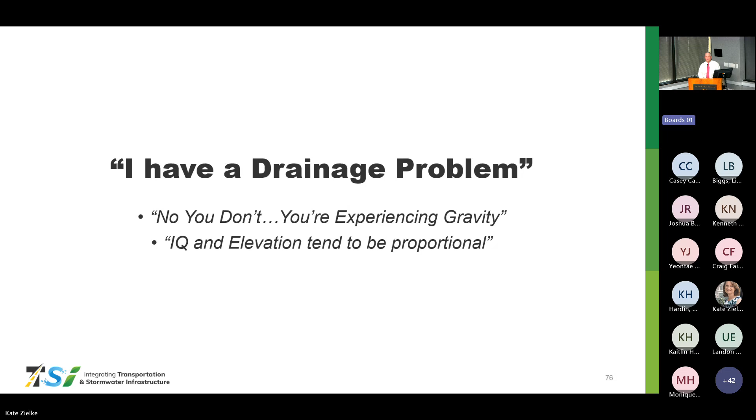Whenever we're encouraging low impact development techniques and other green infrastructure design considerations, I ran into an issue. We kept having problems in our developments, and I got to looking.

Whenever I was doing bridge designs and culvert designs earlier on in my career in Wise County, I was using somewhere around 10 inches per hour for rainfall intensity. I got to looking at some of the developments that were getting turned in, and they were using 6 to 7 inches per hour. If you look at that calculation real close, that's a 53% increase in runoff that we were not accounting for. I'm still having issues with that. Some of the developers' engineers are sending those to me, and I'm having to correct them and say, quit looking at a graph or a bar chart to find your runoff and start doing the calculation so that you're actually accommodating the actual runoff we're experiencing.

I've heard the phrase go green several times today. I would encourage you to go native instead. We're having problems with developers when we're doing our thoroughfare plan. They say we need water, whether it's surface water or groundwater.

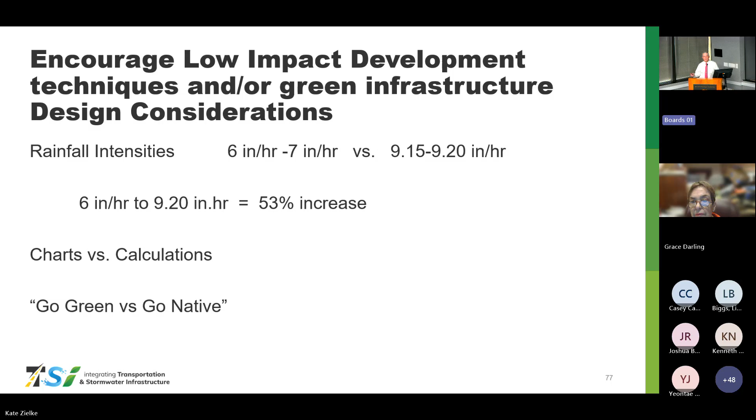Everywhere I go, people are running water out on the ground so their grass will look green. The reason I say that is because where I'm from, you get 26 to 29 inches of rain per year on average, and people are bringing in St. Augustine grass from Houston. You can't sustain it in that environment without running water out on the ground. So I would encourage you to start looking at going native instead of going green.

Protecting against erosive velocities, we put it in our development rules and regulations, and I'd encourage you to also start having pre-development meetings with your engineers and developers, and pre-construction conferences. I've had pre-development conferences where one guy came in who had already bought the property. I said, you don't have access onto a TxDOT road, you're in a floodplain, you're in a breach inundation area, and you're not building roads that'll meet Wise County specs. By strike 5, I thought he was going to need professional counseling.

But if you can speak to these people before they get into it and buy that property, then you can at least let them know what they're getting into and what they're going to have to do to meet your standards, to meet your criteria.

On ours, we've got a maximum of 6 feet per second. I've got a lot of sandy country on the west side of Wise County, and we're also saying no more than a 5% increase in velocity. As for rock filter dams, I don't know how many sets of plans I've had where somebody puts them in our ditch, and then it's something we've got to maintain. They don't automatically fix the velocity problem.

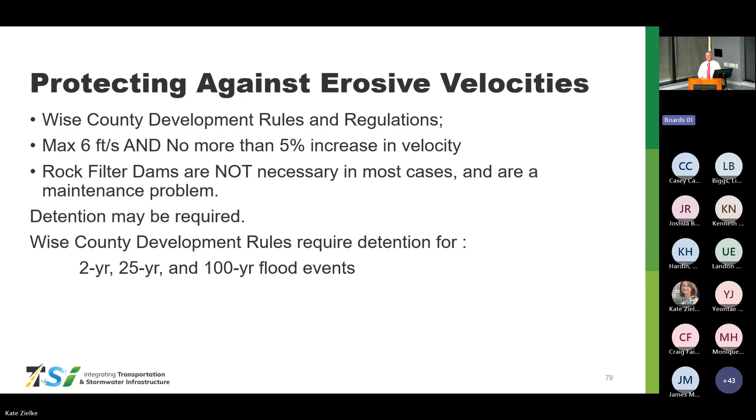We've already touched on this a little bit, but this is where we get into the 'I hate change' part. Remember this phrase - I've tried to tell this to a lot of young engineers and older engineers that should have known better: the Almighty had a good plan, try to stick to it.

Whenever you think about that, in our development rules, we've made it where there is zero change at the boundary of the development. And we've had to defend this with FEMA also. We had a 4,400 acre development. We reviewed it, zero impact at the boundaries.

They came back and an EIT sent me an email saying you're in violation of your own ordinance. I said, no we're not. We had a meeting with the developer, his engineer, myself, FEMA, the contractor - there was a dozen people in that room. I told the people from FEMA on the screen, we reviewed this and said there's a zero change at the boundary. There's no impact to any of the structures, and there wasn't but about 5 structures on the whole property. And they said, well, this will be the easiest one we've ever reviewed.

Notify the impacted properties around you, proceed. That was it. So I would encourage you to do a zero change.

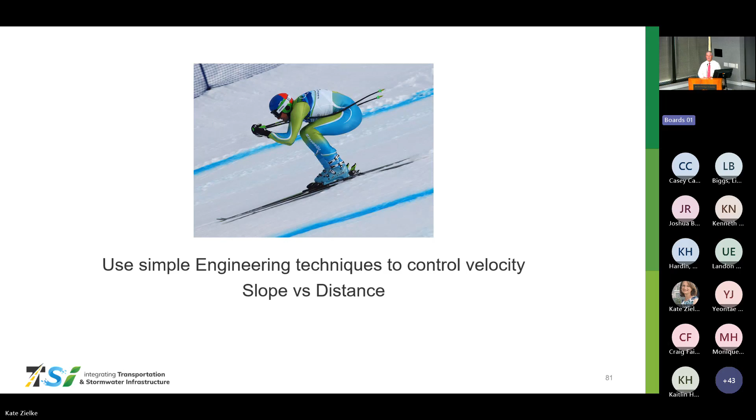I'm not going to get into Jelane's topics too much, but I will encourage you to look at flood control dams. In 2015, the flood that was mentioned, we had two roads in the county that got washed out. They were both downstream from where we did not have a flood control dam. Everywhere that we did, we might have had damage, but we didn't have this.

This one was one of the places. That hole is about 9.5 foot deep and 45 foot wide. That used to be a road. It washed out a 48-inch pipe, and we never found the pipe. It is downstream somewhere on somebody's property. So I would really encourage you to look at your flood control dams.

Also along those lines, one of our Wise County title companies went back and refreshed all of their easements, because whenever you have a flood control dam, there's usually an easement, and it may be a blanket easement for that whole property. If you have an easement, you've got some leverage. That title company did that because most of those lakes were built in the 50s, 60s, and early 70s. If you go back 50 years, you quit seeing that come up on the title search.

By that title company going back and refreshing those, now the first thing they pull up on that property is that easement, and it tells that developer, and you, don't build here. But you would be amazed how many people think we can build there and we'll have lakefront property.

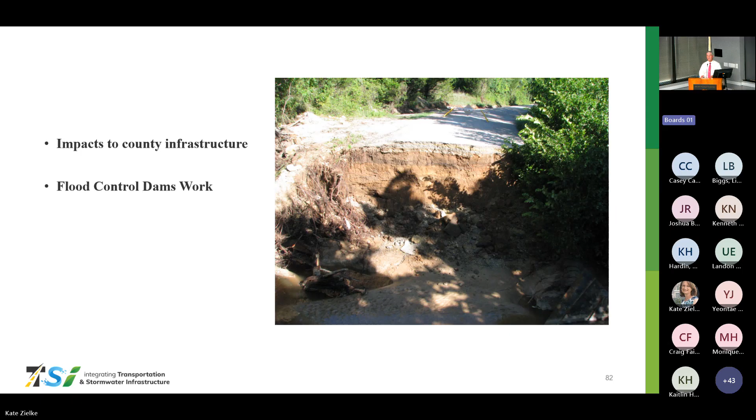A lot of the things you're going to have to deal with, and this is in a floodplain. I was threatened to be sued by two different lawyers over this property this year. They called me and said, well, you can't say no on that floodplain permit. Neither one of them has got it to court yet. The word no does work.

You have very little leverage in the counties. You have no zoning authority. Counties in Texas do not have zoning authority. I can't go in there and say you can't build here because of this reason. The only thing I can do is say you can't get a floodplain permit, and that is to get permission.

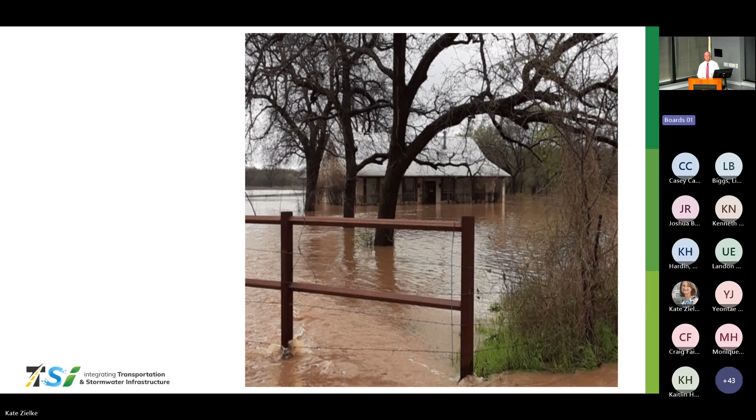This is the same house. It looked great a minute ago whenever it looked like you could do some yard work in it. That house stayed four foot deep in water for six weeks during 2015. But right now, I've got people wanting to build in it. That's the barn right beside it. There are huge impacts to private and public property, and I'm taking this picture from the public road.

Put this in your development rules and regulations and in your flood ordinance. I would encourage you to look at that zero point zero change, because the people who have to go back in here and get a floodplain permit are going to have to get one for the existing conditions. Then they're going to have to come back and say, all right, here's one for the proposed conditions. To do that with zero impact, most of them get ready to sell after they find that out.

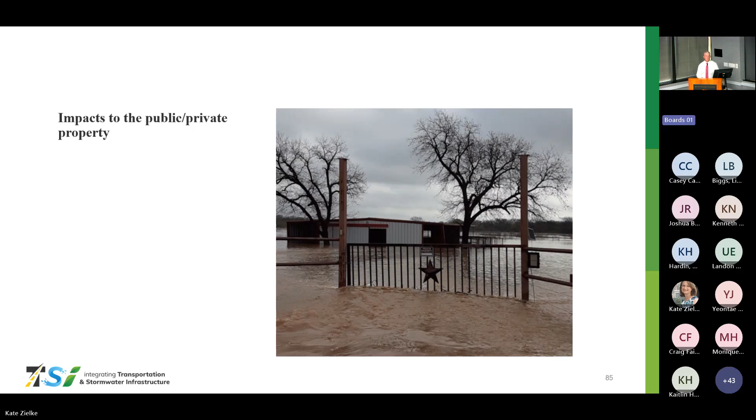The person who owns it now bought it sight unseen. They'd never even seen it there. There's a flood gauge 200 yards up the road from this place. They said, we've never seen that. So they didn't even know.

When you're talking about the size and conveyance of streets and storm systems, adequately and safely conveying traffic - the guy who took this picture lived on the side that's shut off. He had no other access out of there. This is in a platted subdivision, not in the Zone A floodplain. This one is not, but it's also upstream from one of those flood control dams. This road should never have been allowed to be built.

We've also made it where you have to have at least two points of access on developments of 25 lots or more. Summer before last, I stood at a gate at the Wagner Ranch and reported a fire. It took them 20 minutes to get there with either a set of bolt cutters or a set of keys to get in. I watched 100 acres burn in that 20 minutes.

The guy who was on the committee with me for the development rules and regulations said all five of us on that committee were also first responders. He said, Chad, you know we can get in there. I said, yeah, we can get in, but can those people get out? They might not have bolt cutters or a key to that gate. So we've made it where they've got to have at least two points of access for any lot, anything over 25 lots.

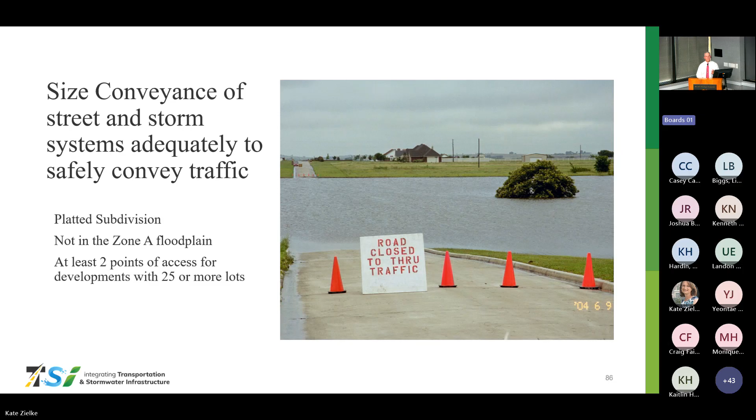Breach zones, breach inundation zones. I'm not going to get into the lanes too much, but you need to have this in your development rules and regulations. This property right here, it's hard to see, but you can see the house built on the right, and the lake a little over to the left.

They are not allowing us access to where we can maintain that dam. I also had, on June 23rd, a legal hearing over a lawsuit about breach inundation zones. He said, you can't do that to me, that's a takings. As an engineer, I'm required as the first canon in the code of ethics to protect the public safety, health, and welfare.

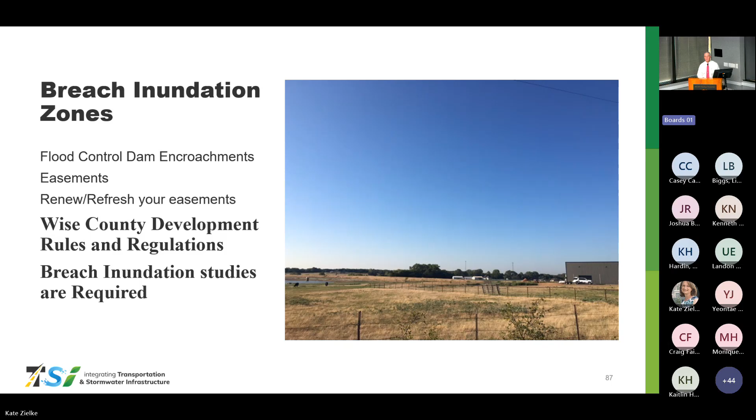Unfortunately, you've got some legislators who would like to strike that out of Chapter 232 of the local government code. I'd encourage you to speak to them, say leave that alone. We need the ability to protect the public safety, health, and welfare.

Jelaine probably knows where this one is. Can you see the dam to the left? Can you see the houses immediately downstream to the right? I actually had a pre-development meeting with somebody who lived in one of those houses. It was all I could do to keep from telling him, you're an idiot.

Why would you build immediately downstream from a place that could breach and take you off the map? That sounds funny now, but think about down there in the hill country. How many people would build back where it just got flooded and washed out? People's memory is short. They had a flood down there in '87, and another one in 1932. People still want to go back, and developers still want to go back and put houses and people there so they can make a profit.

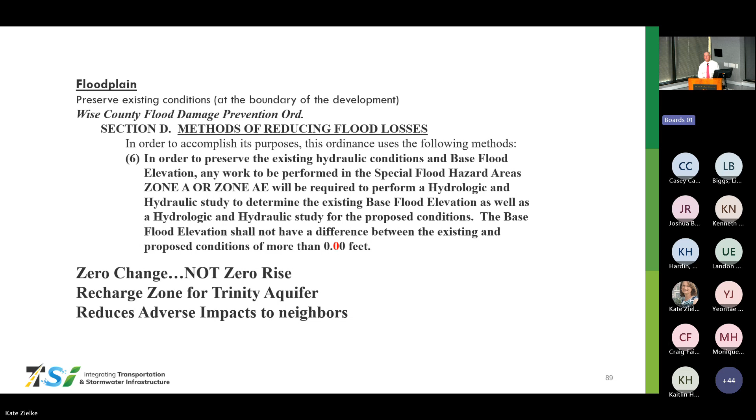Remember this one: zero change, not zero rise. It puts a bigger burden on the developer and his engineer to keep people out of the floodplain.

Breach inundation, that's in our development rules also. We've got it where they've at least got to do a study to see where that breach inundation zone is, so that we can keep people out of an unsafe situation.

Detention rates, I've mentioned those for 2-year, 25, and 100-year storms. So far I've only had one of those since we put that in. It's not that hard to design, but you'd be amazed how many said, well, we've never done that. My response to them is, you're an engineer, your job is to find solutions, figure it out.

How many of y'all remember this from earlier this spring? It's important to keep people out of those areas. That dam washed out, and because of that, anybody downstream just lost all of their property, if they didn't lose their life. I would encourage you to put that in your development rules and regulations, and once again have pre-development meetings with developers and their engineers as much as possible to prevent these problems from happening. It can save them a lot of money as well as you a lot of headache.

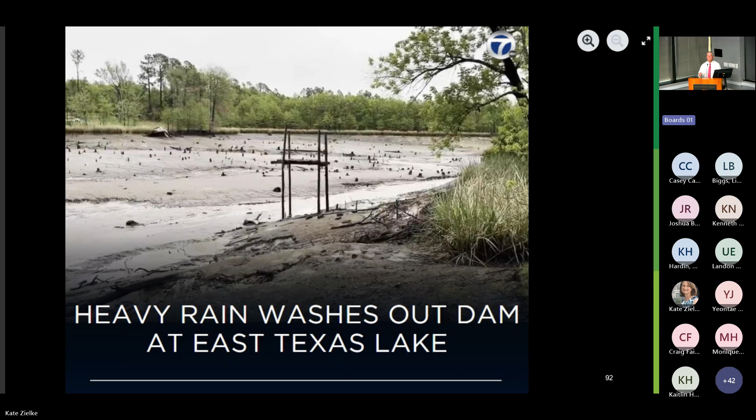Chad, great presentation. I have a question regarding your slide a few slides back where you talked about the Wise County Soil and Water Conservation District. So they have rules that you placed into your ordinance. Is that what I saw?

We work with them. Fortunately, we've got a guy who is our 911 address coordinator who is also maintaining all of our flood control dams, and he works for the NRCS as well. So whenever, I would encourage you to get with them. They're a huge resource and they're usually free.

And then some of ours, they've got protected maps because they don't want people to have terroristic activity along any of those flood control dams. But you can go in and talk to them, and a lot of times they will give you that information knowing that you're going to keep it safe, but also to let you know if somebody is in those areas that need to be protected.

Any others? Thank you.

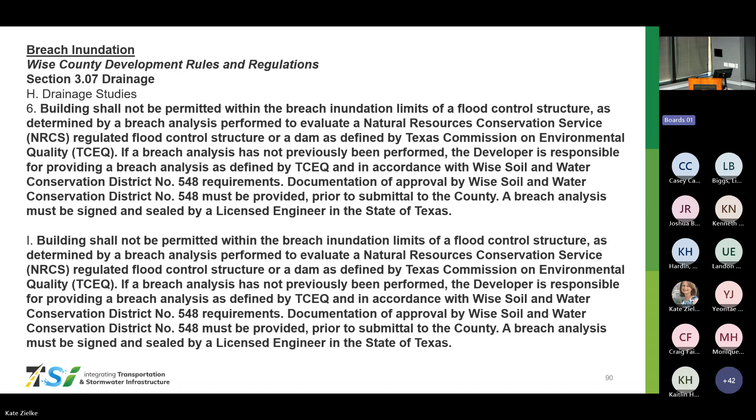Thank you, Chad. So our next speaker is Alyssa Shepard, PE CFM. She is with Dallas County. Her presentation is how Dallas County uses higher stormwater and floodplain management standards.

Good afternoon. As Kate said, my name's Alyssa Shepard and I'm with Dallas County. I'm the floodplain manager, and Noe Villarreal is also with Dallas County, here with me today as well. I'm excited to be here, and excited to see some of my county friends here in the audience. We just heard from Chad with Wise County, but I also see some folks from Denton County and Tarrant County, and I've met some people from Hood County.

So I'm excited to see you all here today. Okay, so I'm going to talk a little bit about what we do at Dallas County. One of the things, just like other county governments, we have a county judge and then 4 commissioners. One interesting thing that we do at Dallas County is we partner with our 31 cities for transportation projects. That's really our core competency at Dallas County, but we make big projects happen in that area.

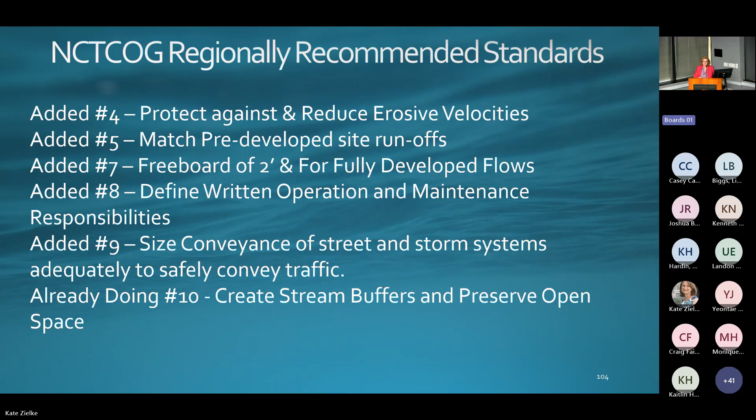We sized the conveyance of street and storm systems adequately to safely convey traffic. And then we created a stream buffer. And we have a great open space program at Dallas County where we have a lot of preserves where we do save that open space.

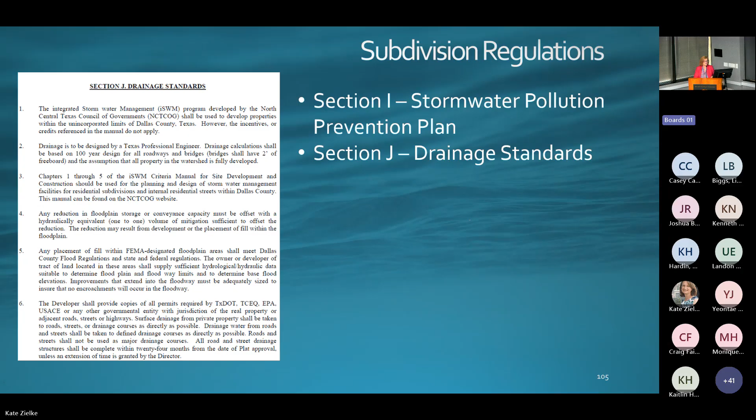So within our subdivision regulations, we have a section dedicated to stormwater pollution prevention and then drainage standards as well.

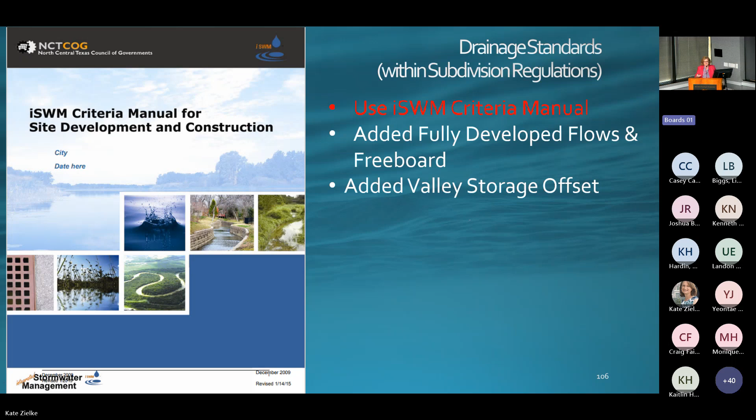One of the things I wanted to highlight is this criteria manual. The iSWM criteria manual really helped us with a lot of things because it identifies, for example, the detention pond maintenance plan is in there, an example of it. And then the criteria manual really identifies how to lay out a subdivision and how to go about it from a higher standards and drainage stormwater standpoint. That was really helpful for us to just adopt that standard, and it's already there, a lot of these items that are important to us.

So one thing that's a little bit of a challenge for me when I first started working at Dallas County, I understood that we were a member of the NCTCOG and the Trinity Common Vision program that Sue referenced earlier in the presentation. And that's for cities and counties adjacent to the Trinity River corridor to adopt higher standards. So I had heard about this and understood that we were members. And so I had to go digging through court orders to actually find it there because it wasn't identified in our floodplain management regulations.

So in 2019, when we updated our floodplain management regulations, we actually codified that into the regulations stating that we're members because we had done that previously through court orders. And then also in 2019, we defined stop work orders and enforcement for floodplain violations.

So I want to switch gears and tell you a little bit about how we do our permitting at Dallas County. One of the things that we use is this portal. It's called My Government Online. And our permitting is funneled through a different department that's really dedicated to permitting, and they're known as the Unincorporated Area Services Group. And so we work with them.

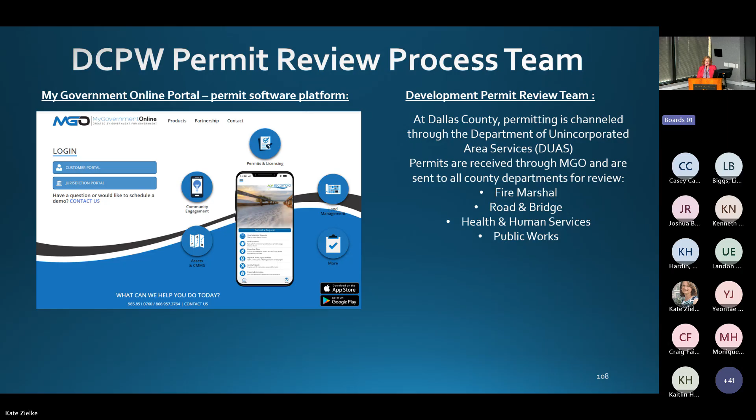The permits are received from the applicant. And if you look at this portal on the left, it says customer, and then below it, it says jurisdiction. So the applicant can enter that portal and place all their permit application as well as all their documents there. And then we get it and we review it. So it goes through all these different departments, and some of those include the fire marshal, road and bridge, health and human services, and then us that are in public works.

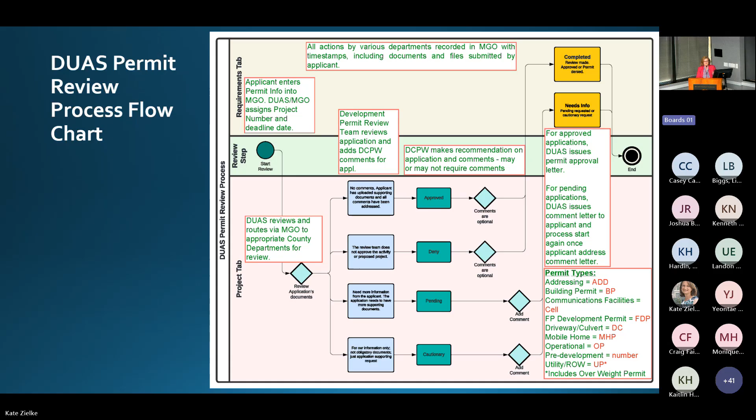So this is the flow chart showing how it works. But basically, the application and the supporting documents come to us. We review them, we put our comments in, and then the applicant gets them. And we kind of go back and forth a few times, but eventually, usually they've addressed our comments with the permit process.

And then this is the detention pond maintenance plan. This is straight from the iSWM manual, but it talks about how to address maintenance at a detention pond, and it's just been a real handy tool for us.

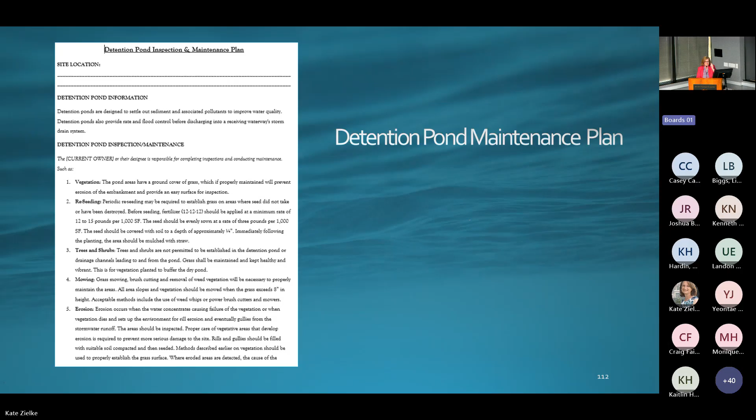So I wanted to also share with you about how our Public Works Department is now accredited by the American Public Works Association. Dallas County is the very first county in this whole state of Texas to have received accreditation from the APWA, and it's something that we're really proud of. It's provided us with a central location for all of our documentation and our standard operating procedures. It's increased efficiencies and reduced wasted resources. And then it also provides a great justification for budget requests.

In order for us to get this accreditation, we had to document our practices in 40 key areas using this Public Works Management Practices Manual. These 40 key areas covered everything from program management to beach management. But since we're a county government, a lot of these things didn't really apply to us—for example, we don't operate a water treatment plant, which is something pretty key to Public Works typically.

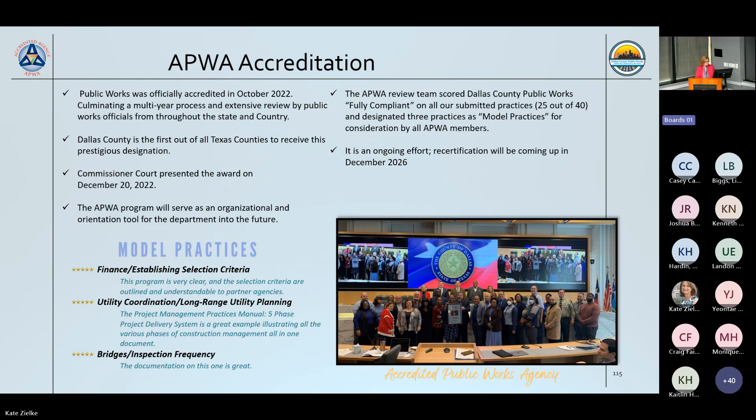Another thing we've done—and Stephanie alluded to this in her presentation—is a master drainage plan that counties can do, and that's one thing that we did. It's kind of neat about the state flood planning process that the Category 1 projects gave the opportunity for county governments to take the lead with these drainage plans, master drainage studies. So in Dallas County, we did that.

The reason the Texas Water Development Board kind of gave the lead to counties is because, if you see on our map, this area is identified as a HUC 10 area, and you had to do a study at least the size of a HUC 10 area. One of the things happening at Dallas County at the time was that our inland port was growing and growing, so we wanted a study of that area, and we included that in the call for projects back in maybe 2019, 2020, somewhere in that time frame.

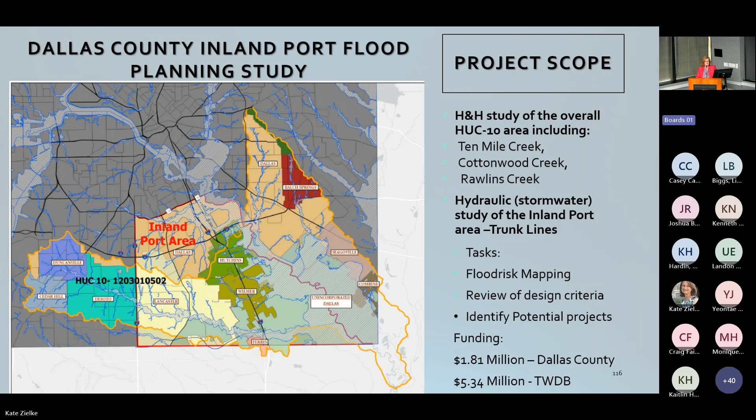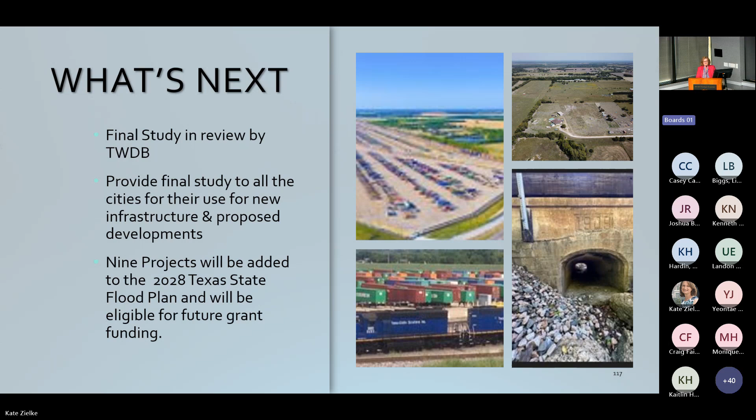Right now we have submitted our final study to the Texas Water Development Board for their review, and they're reviewing it now—they have a few more days to give us comments. We're looking forward to having those projects added, and also the study made available to developers and cities and whomever, so it will be part of the public domain.

Another thing I want to touch on is an interesting project I'm working on—we were contacted a few months ago by the USGS, and they partner with communities all over the country on installing stream flow gauges. They had some extra equipment available, and we're able to get these installed free of charge.

I'm keeping my fingers crossed, but at the next Commissioner's Court agenda, on August 5th, I'm hoping our commissioners authorize us to obtain these, and they'll be installed shortly thereafter in August. It was kind of a scramble to get this done because we had to do it within this fiscal year in order for them to install them free, but we do have to pay for the ongoing maintenance of them in future years.

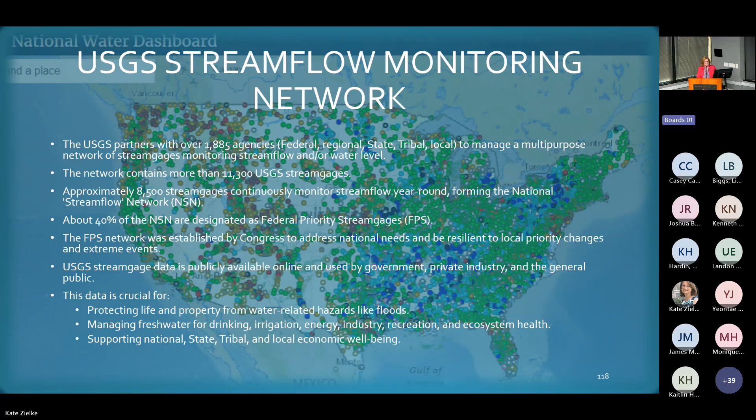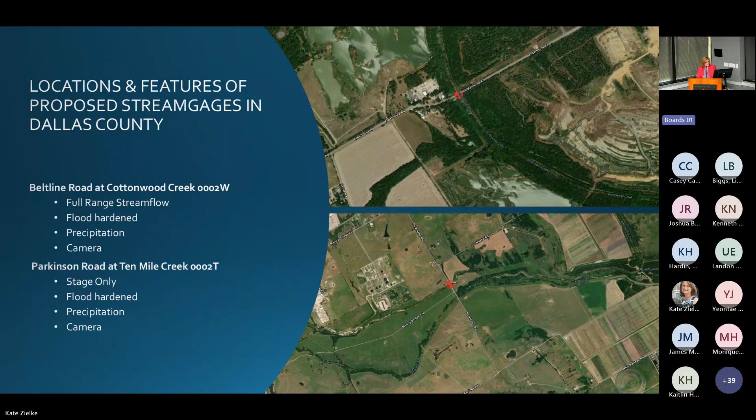They're going to be located at two places in southern Dallas County. One is going to be at Beltline at Cottonwood Creek, and the other is at Parkinson Road at 10 Mile Creek.

So we're excited about that. And then I know we're talking a little bit about small watershed dams, and Jelaine is going to talk about that in more detail later, and Chad talked about it earlier. But we do have 3 small watershed dams that we maintain in the Rowlett Creek watershed.

And these dam locations are in cities. So one of the things that we wrote into our MCIP agreement with these 3 different cities - one is in Rowlett, one is in Sachse, and then one is in all 3 cities, you can see that one in the center - we said, hey, we're not going to give you funding for these roads unless you come up with a plan for how you're going to maintain these dams.

And so we're working with the NRCS and the Dalworth Soil and Water Conservation Board on incorporating these cities into becoming sponsors. And it looks like we also might get to work with the city of Wylie and Jelaine on that as well. So that's an exciting project that we're working on.

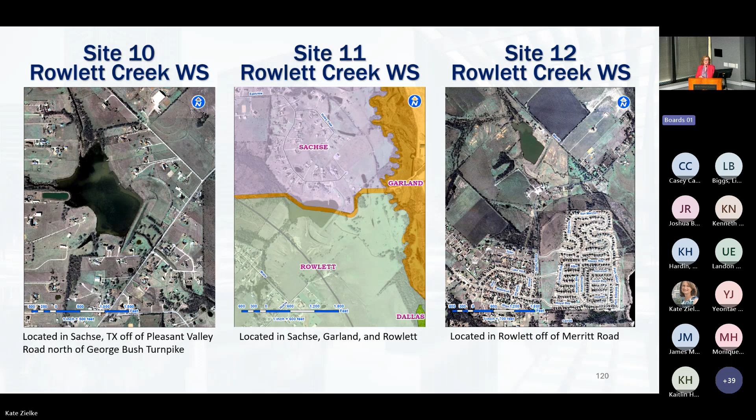I know it seems like this isn't really maybe pertinent to this topic, but as far as the county's concerned, this would bring awareness to these different municipalities because of the breach issues, and they're doing the permitting downstream of these dams. So that's largely the reason why I want to transfer these dams to where they're being taken care of by the cities instead of by Dallas County.

Our hope is to have that done by the end of fiscal year 2026. That's our goal for that project. And so we're frequently going to the Dalworth board meetings and trying to get them on board with that.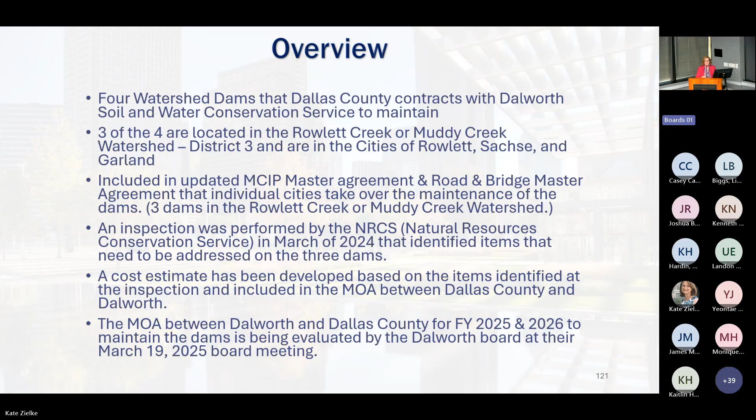And that's something that I am very afraid of with these small watershed dams. I feel like the conservation district boards that are responsible for maintaining them - and sometimes it varies, it can be different in different areas - but for us, Dalworth is kind of dying, and I think some of these other more rural water conservation districts are as well. And so that has me thinking that it's good to transfer them to other agencies that have the resources to maintain them.

And so with that, I'll take questions, but that's really all I had.

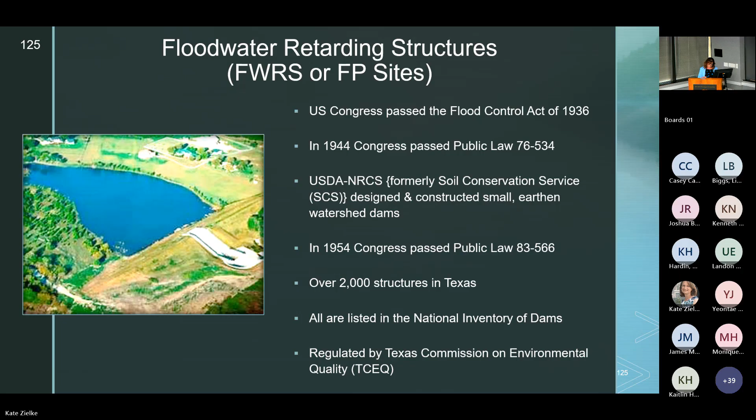So let's talk a little bit about the easement and watershed project easements. When the Soil Conservation Service, which became the Natural Resources Conservation Service in the 90s—it's the same agency—went to build these, they had to work with local sponsors. They worked with local governmental entities.

Soil and water conservation districts are political subdivisions in the state of Texas. They were created under agricultural law, and we do not have taxing authority or power of eminent domain. So soil and water conservation districts were partnered with other municipalities or agencies that did have taxing authority and powers of eminent domain. So to be a watershed project sponsor, you must be a local government entity.

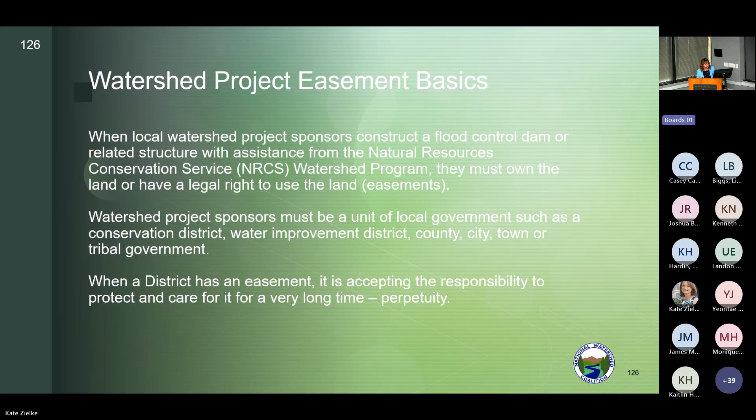And then the district has the easements. The Soil and Water Conservation Districts hold the easements, and they are responsible for those in perpetuity. Those easements allow for the construction of the dam and the spillways and for permanent water storage in a sediment basin. Now, some of them do not hold permanent water, but most of the ones in this area do.

The thought was that in the 50-year economical return lifespan of the dam, back to the federal government, those permanent water storage areas would be completely full of sediment. In most cases, that hasn't happened. What we don't know about the small watershed program, and it's not talked about—again, these were all in rural agriculture land. We are actually an agricultural entity.

There was also conservation practices that had to be put in place upstream of the dams. 60% of the watershed had to be included in conservation practices—terraces, waterways, converting cropland to pasture land, permanent rangeland, those types of things. We don't hear about that. And that's a huge issue now that we have development in those areas.

The easements also give us the permission to store floodwater temporarily. So they're small earthen dams. I'll show you kind of how they work in a minute, but they catch water, hold it for a short amount of time, and then slowly release it downstream. But that short amount of time can be anywhere from 15 to 30 days once all inflow stops. So that flood storage can be continuous or stacked.

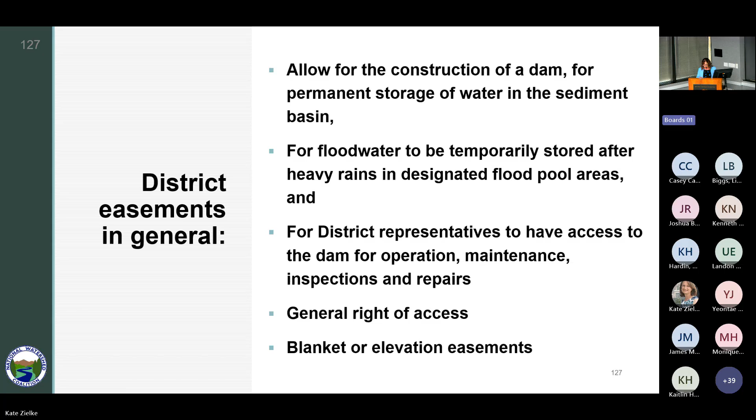The easements were not purchased, they were donated, and that gave us the right to access across the land. They also knew somewhere in the subwatershed where they wanted to put the dam, but depending on easements, it might have moved slightly upstream or downstream. I think the idea was that once it was built, they would go back and define the easements, but that never happened.

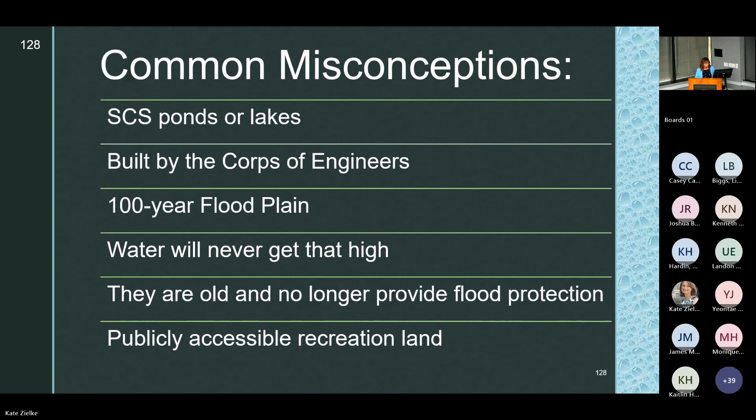I got this recently from the Texas State Soil and Water Conservation Board. They are the state agency that assists soil and water conservation districts, but we are not under them. So every soil and water conservation district is its own entity, and we all vary just a little bit. The idea from the federal government was locally led conservation, so every district varies just a little bit.

There are 2,038 of these small watershed dams in Texas, and as of recent numbers, 753 are high hazard dams as defined by TCEQ. There are a few that were constructed as high hazard, none in Collin County. I don't know about this COG area for sure, but of the 753 that are high hazard, 608 still do not meet state criteria for a high hazard dam.

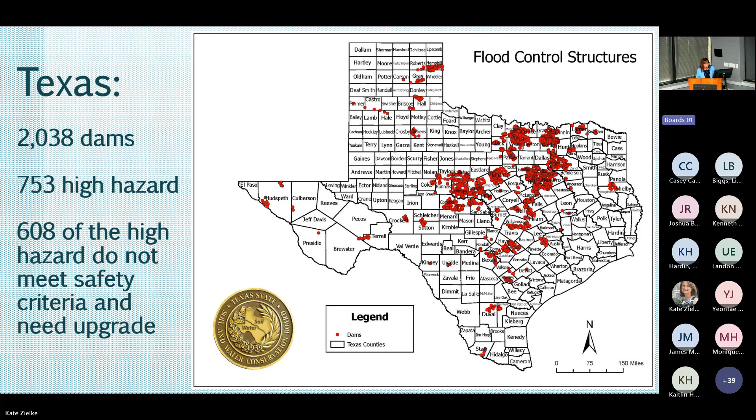I got the state board to assist me and pull the numbers for COG, and this is what we have. In Collin County we have 99 dams, and 60 are high hazard now, when it was 0 when they were constructed. For this region, there's 658 dams in North Central Texas COG, and 250 of those are now classified as high hazard dams.

So this is how they work. You have an earthen dam with a pipe that goes through the middle with an inlet, usually a kind of drop structure. That normal conservation pool level, the normal water pool level, is your sediment storage. As water rises, it stacks against the dam. Then there is an auxiliary spillway, typically at one end of the dam, for overflow if it gets higher than that pipe can handle.

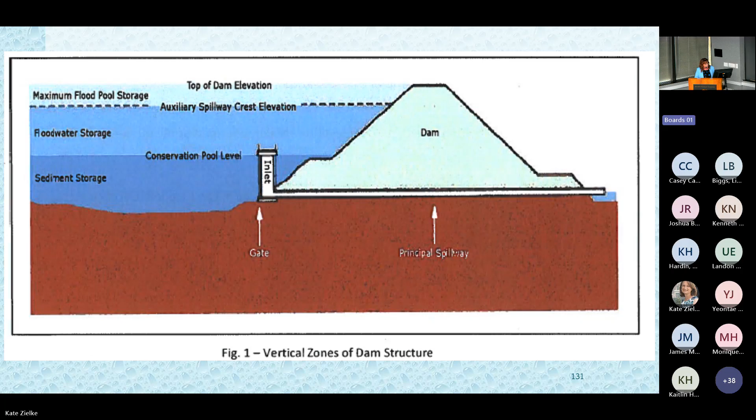There is a lower gate valve, but we cannot control the water level with it. That lower gate valve only drains the structure. So if we opened it, well, we can't reach it during a flood event anyway, but if we could, it wouldn't let more water out and it wouldn't let water out faster. It would just drain the lake below the normal conservation pool.

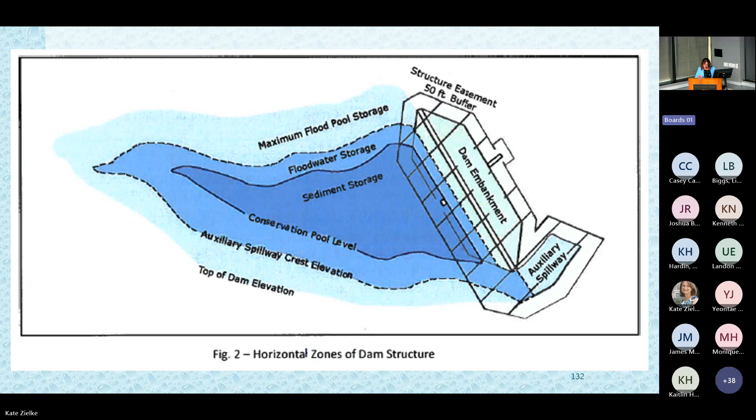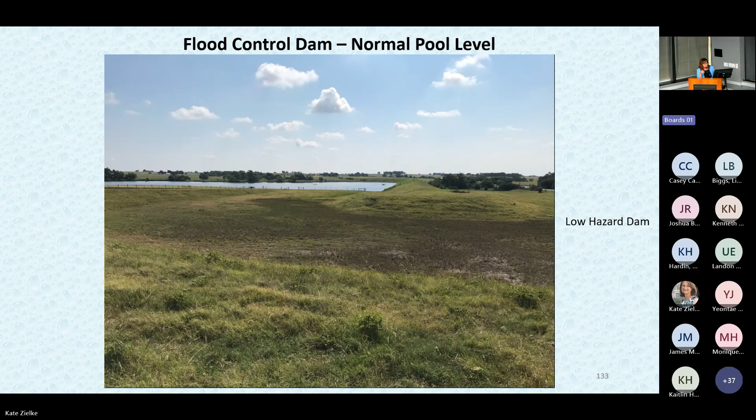Here's an aerial view, kind of the same thing. I know I'm taking some time, so I'll skip through these quickly. This is a conservation pool level. This is not one in Collin County, but I got this from the state board because it's a great visual. This slide is probably after the spillway function, because you can see it has eroded out. This is what the water level looks like at normal pool, and this is what it looks like at flood stage.

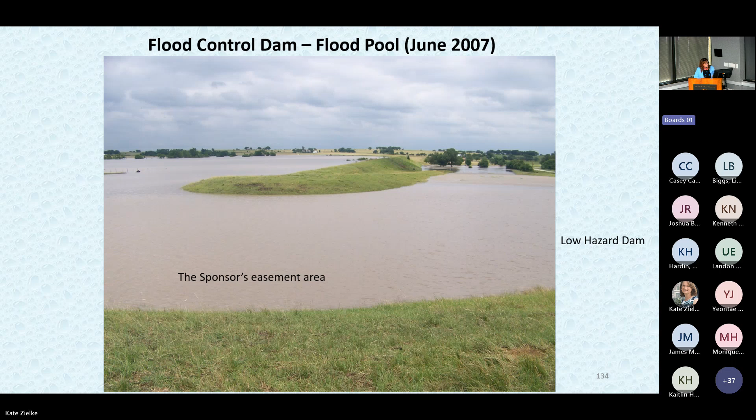So this structure is functioning exactly as it was designed to do. It looks like there's maybe a foot and a half of freeboard on the dam, and the auxiliary spillway is flowing with probably 2 to 3 feet of flow.

Urban creep is obviously a huge development issue for us and a concern for our easements. As has been mentioned, our easements are really, really old. They're not pulling up a lot of times in title searches, and that's become a real problem. We're getting locked out of structures, we can't get access, so there's a lot of issues with this.

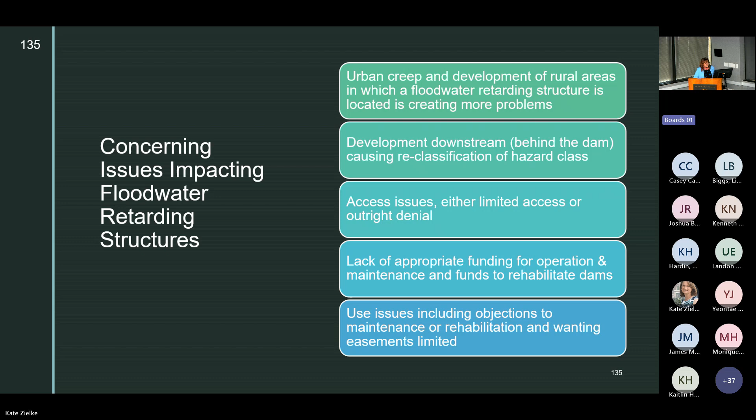Oh, I just went all the way through my slideshow. Yeah, it skipped to the end. Sorry about that.

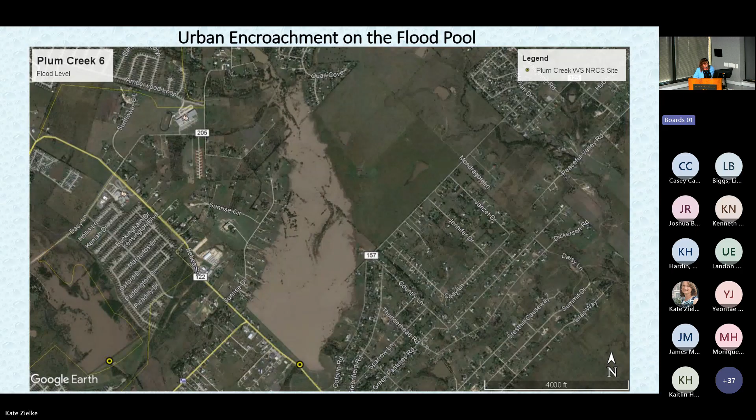So this is what it looks like at flood stage, and this is not as high as the water will get. At the bottom of the picture is the auxiliary spillway, which is not even flowing yet. So the water will get higher, and you can already see houses in the water there.

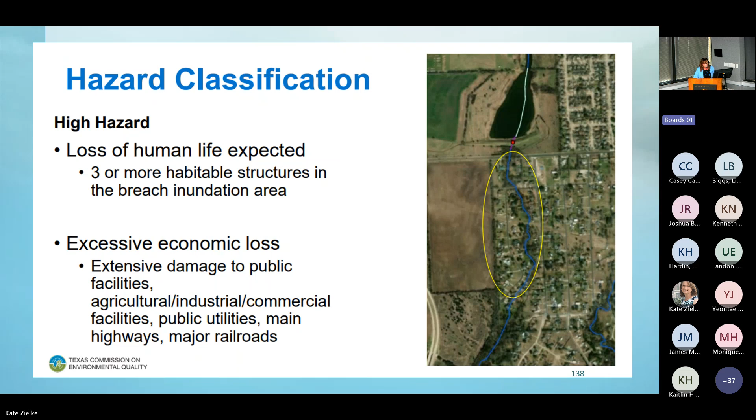This is directly from TCEQ. This is what causes a hazard classification: development behind and downstream of the dam, which in most cases Soil and Water Conservation District easements do not include. So we have no control over that area, and we rely on municipalities to help us with those issues.

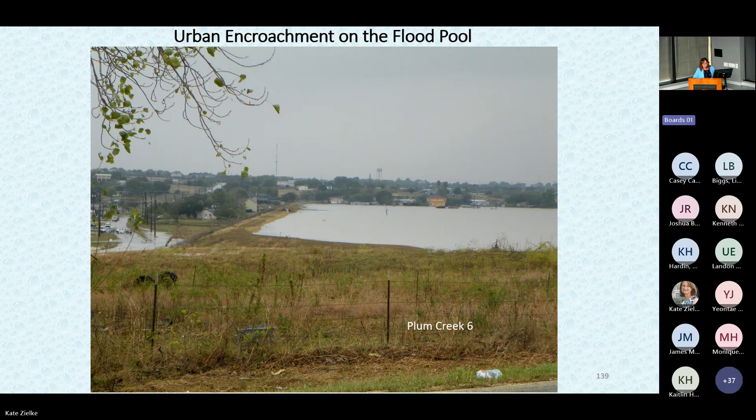This is the same dam I showed you in the other two slides, Plum Creek 6, showing all the development right behind the dam. That's how close the water is to overtopping the dam, and you have all those houses directly downstream.

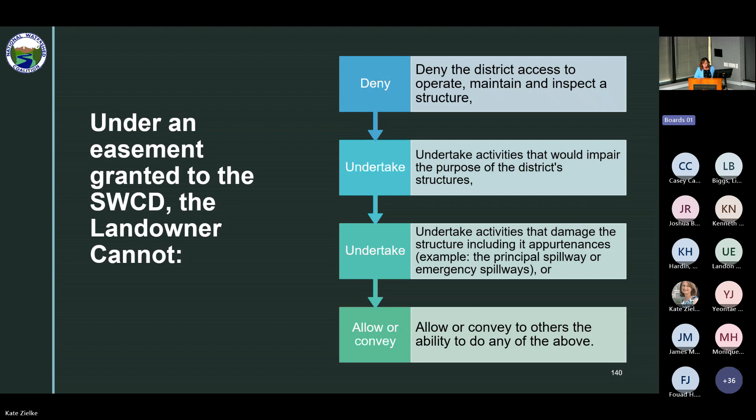Under an easement granted to a soil and water conservation district by law, a landowner cannot deny the district access to operate, maintain, and inspect a structure. They cannot undertake activities that would impair the purpose of the district structures or damage the structure or its spillways. That includes pretty much everything, anything that might change the way the structure functions, like building homes or roads, that's how the easement was written. And it's perpetual, it goes with the land, so you cannot just do away with it if you sell the property.

The Texas State Soil and Water Conservation Board, as of this year, has a new interactive online GIS layer you can access through their website. It's a flood control easement notification area. This is just a screenshot, but you can put in an address anywhere in Texas, and if it pulls up inside a blue area, you absolutely need to be working with your local soil and water conservation district. That gray area does not define the easement, since easements may extend beyond it because of the blanket nature and access rights. But if your address falls within that gray area, you better be contacting your soil and water conservation district.

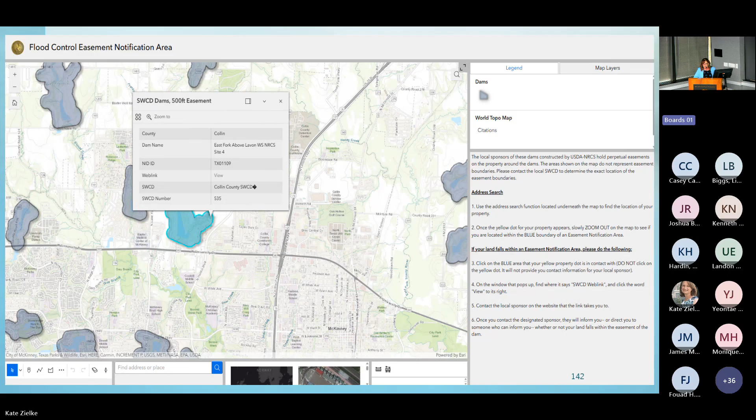So when you click on that blue area, it will tell you the county you're in, the site number, the NID number, the watershed it's typically in, who your local soil and water conservation district is, and a link to their contact information.

In Collin County in 2020, once COVID hit, we became overwhelmed with development and encroachment. My district board started asking whether we could charge fees for some of these reviews, which in the past were not allowed since these dams will be 80 years old next summer. We were told we could not charge any fees, but they found some documentation that said maybe we could, so we decided to start charging encroachment fees. I went to the board and said, if we're going to do this, we really need policy and a manual.

We always had policy, it was kind of a one-page thing, but we developed a very comprehensive manual for encroachment and sent it out to all our municipalities and the county. Our county is working very well with us, the engineering department, to use this, and it's been very successful. Some of the municipalities are still not quite on board, so it is a constant challenge for us.

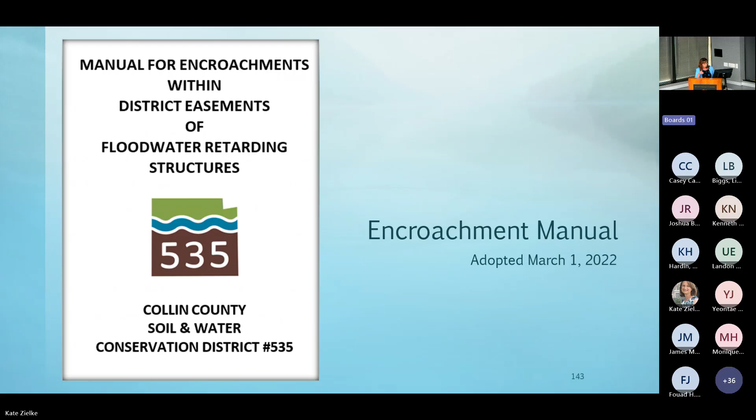We still have a few areas that are rural and agricultural, so our manual has to cover all possible encroachment concerns, from overgrazing a dam to full-blown development. Some of the biggest changes with this encroachment manual, besides the fees, is that now for any dam that has not already been rehabilitated, which is only 8 or 9 in our county, we are going to maintain an easement at least to top of dam plus 3 feet. That allows for rehabilitation in the future, which we know is needed and coming, and we have to make sure we maintain our access areas as well.

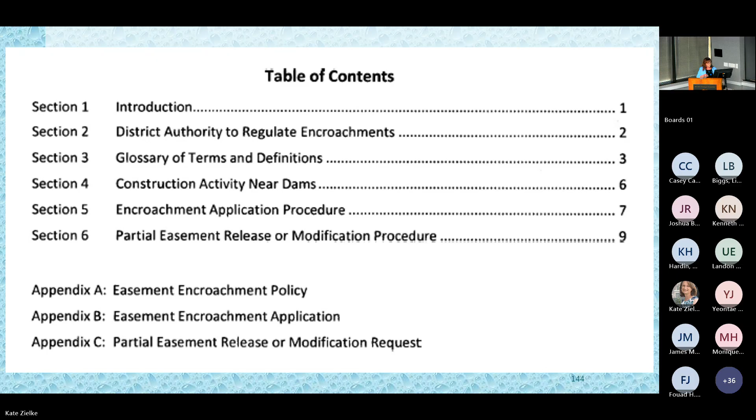Besides our policy, it's important to know that Texas Administrative Code has a whole section for dams and reservoirs. All of these NRCS, SCS constructed dams fall within this, and you may have other private dams in your county considered farm ponds that also fall under TCEQ's regulations.

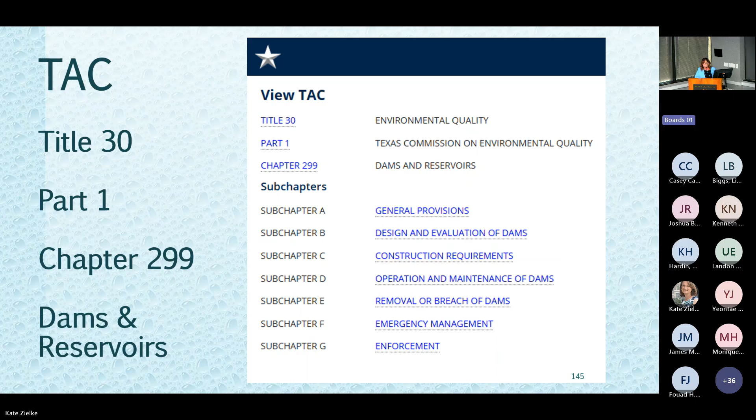So they have certain requirements, such as you cannot dredge within 200 feet of a dam, upstream or downstream. A trench behind a dam within 200 feet is still considered dredging, and anything that may undermine the dam and cause it to collapse is prohibited. You cannot install a utility line or pipeline through the dam or spillway, and any roads constructed should be more than 200 feet away from dams and spillways. Blasting and oil or gas wells isn't a huge deal for us, but it may be for some of you. It's important to know there is Texas law regarding dams and reservoirs.

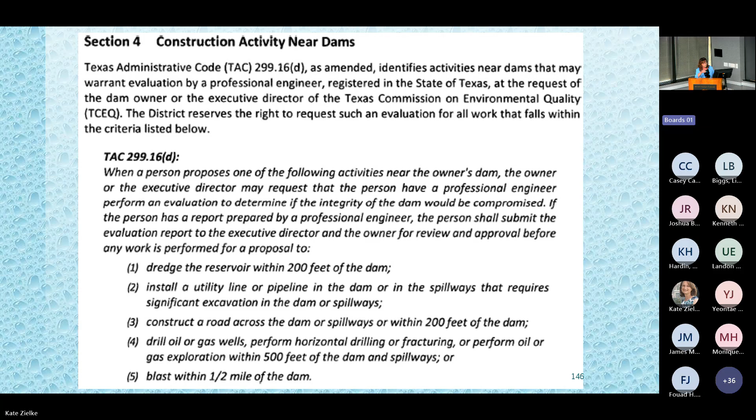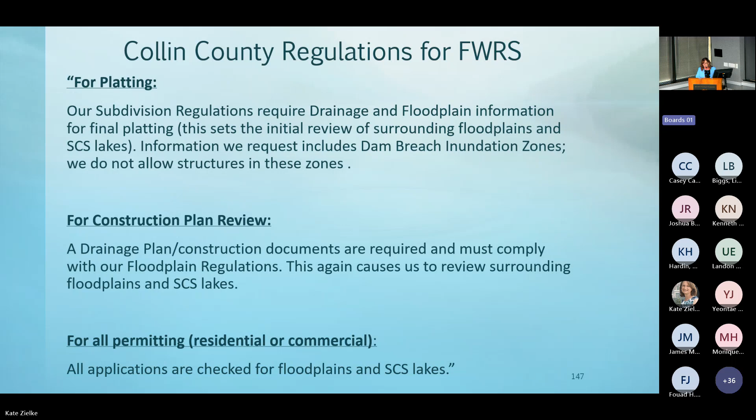I reached out to Collin County because, as I mentioned, engineering has been working very well with us. This is a direct quote from one of the county engineers: they have added that state board GIS layer to some of their GIS layers, and if anything falls within that gray area or even nearby, they immediately send developers to us. They will not even review anything until they have gotten approval from our Soil and Water Conservation District Board. They are also requiring breach analysis for the breach inundation zones and are not allowing permanent homes to be built in that area.

I don't know why it's just my slides that are doing this. Any questions, if we have time? I know I'm a little over and it's a lot of information, but I appreciate the opportunity to be here today.